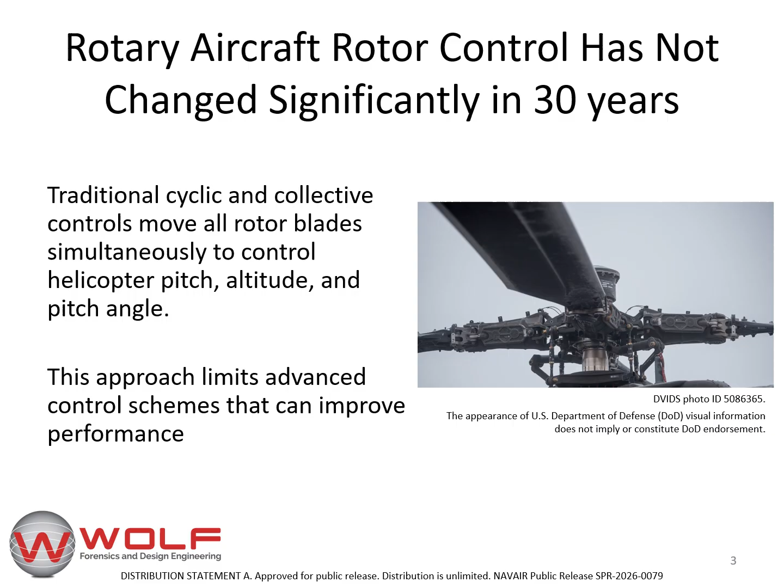Challenges of practical implementation of the existing technologies include reliability, lack of redundancy, failure modes, system performance, packaging, production, cost, and maintainability. NASA started experimenting with different control mechanisms in the early 1990s, including one promising approach, individual blade control, which we will refer to hereafter as IBC.

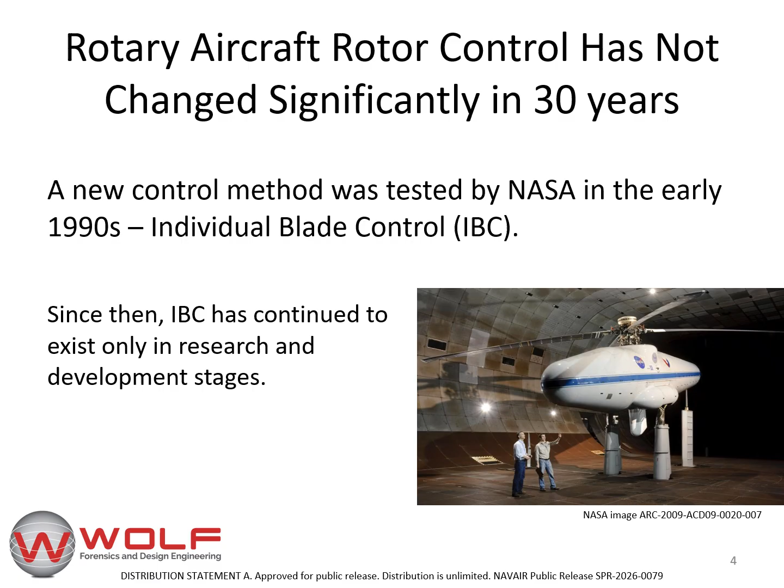As IBC technology has improved since then, Army and Navy technical leads have shown interest in further development for their rotary wing platforms. However, even with Armed Services investment, existing IBC technology has only been implemented in experimental settings, with actuators placed in the rotating system in series with a conventional swash plate mechanism. Utilizing these actuators in the rotating portion requires hydraulic and electric slip rings, which contributes to increased technical complexity and risk.

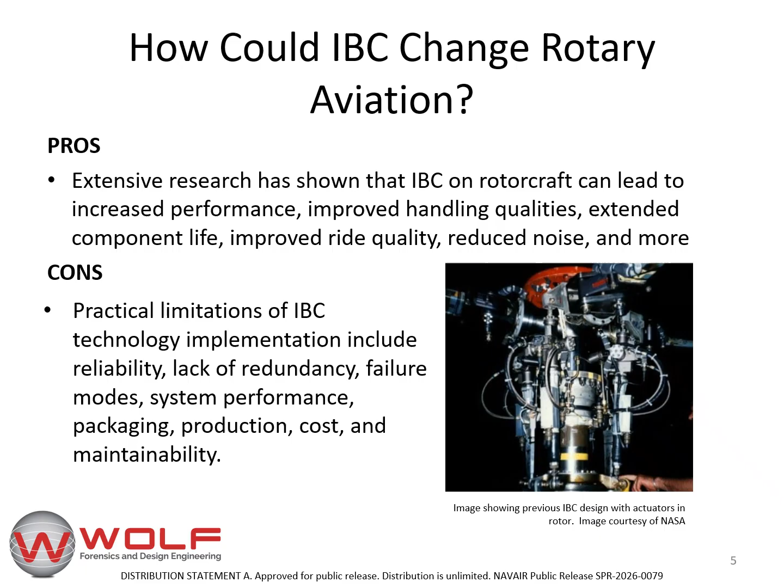The benefits of IBC are well established: better handling, reduced vibration, lower noise, and longer component life. But practical implementation has been limited by reliability, complexity, and integration challenges, especially with systems that require rotating actuators and slip rings to transfer power between the stationary and rotating portions of the rotor system.

The Navy's challenge is to enable fully independent control of each rotor blade, not just at the primary frequency, but up to 7 times that frequency, while maintaining extreme reliability with a probability of loss of control, P-loc, of less than 1 in 100 million flight hours. Maximum pitch authority also needs to remain comparable to existing platforms. This applies to both traditional helicopters and emerging eVTOL aircraft.

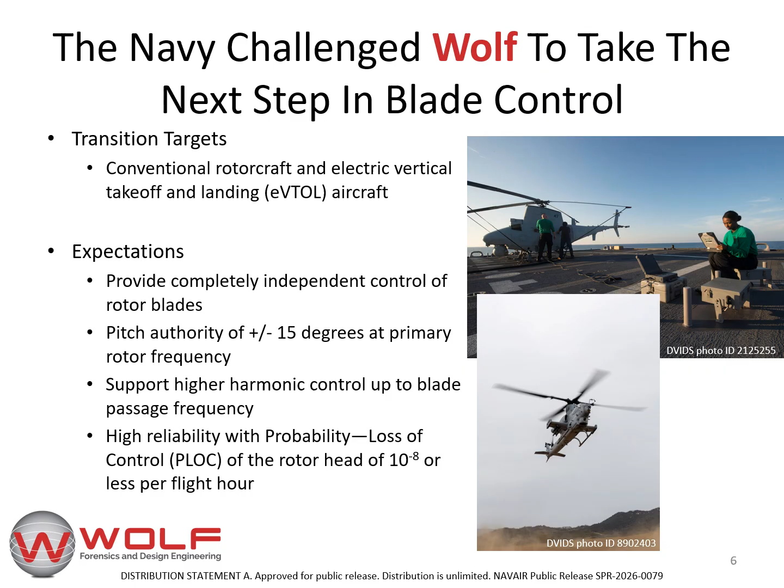Wolf Technical Services has developed a novel architecture that places actuators in the stationary frame, avoiding many of the failure points of past designs. Blade pitch is transmitted via a mechanical linkage. The primary performance requirements for the system are blade pitch authorities of plus or minus 15 degrees at the primary frequency, plus or minus 2 degrees at 2 times the primary rotor frequency, and plus or minus 1 degree at 7 times the primary rotor frequency.

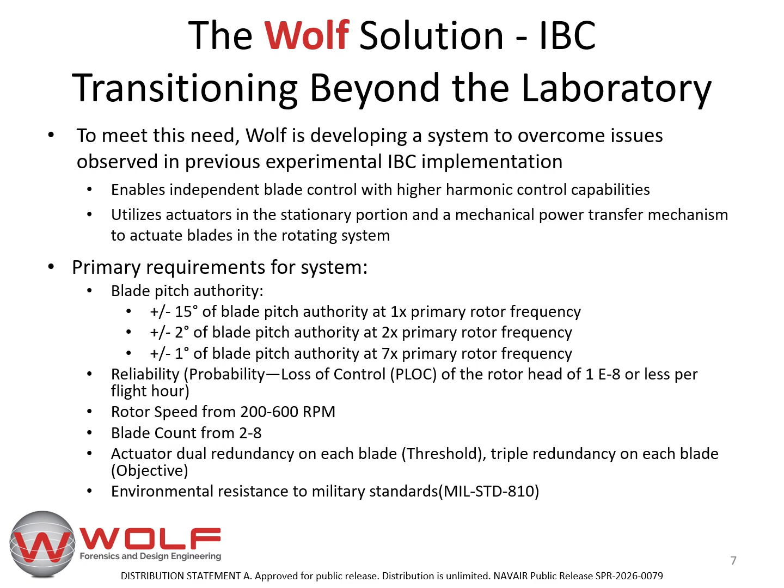The system must also work with rotor systems operating at 200 to 600 revolutions per minute and scalable up to 8-bladed systems. Recall the high standards set for us. Reliability targets are for a minimum of dual redundancy on actuators for each blade and P-loc of less than 1 in 100 million flight hours. The system must also be resistant to environmental conditions tested against MIL-STD-810 standards. Lab demonstrations and testing on a small-scale prototype system were completed during the Phase 1 and initial Phase 2 efforts.

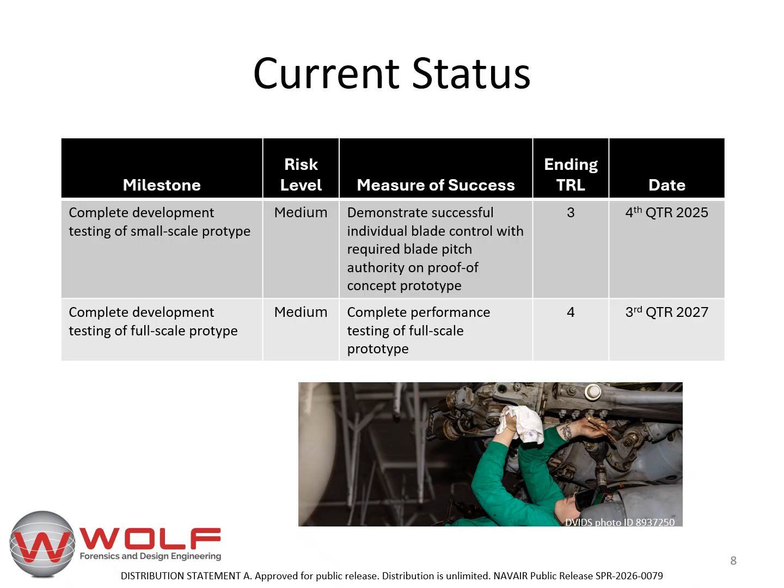Validating core actuation and mechanical power transmission concepts as well as performance. Ground testing on a higher fidelity full scale prototype is planned for completion by the end of the Phase 2 period in Q3 of 2027. This system will incorporate additional features addressing reliability and environmental resistance aspects of the system design.

One of the biggest differentiators is our use of actuators in the stationary frame. Unlike legacy IBC systems that place actuators in the rotor hub, where they're subject to high centrifugal loads and harsh environments, our design transmits control mechanically from the fixed frame to the rotating blades. This dramatically improves system reliability and maintainability, and eliminates the need for high-speed data or power transfer across a rotating interface.

The system supports higher harmonic pitch inputs, up to 7 times the primary rotor frequency. That enables fine control over aerodynamic loads, leading to significant reductions in vibration and acoustic signature. For military platforms, that translates to stealth and survivability. For commercial use, it's about noise abatement and ride comfort.

One of the key advantages of our design is that it supports multiple actuator types, including electric, hydraulic, and electro-hydraulic actuators. This makes the system highly adaptable for integration across different aircraft platforms, depending on available onboard power, environmental requirements, and mission needs. To control the rotating blades from a stationary actuator, we developed a mechanical power transfer mechanism. This approach preserves the benefits of a fixed frame actuator while drawing on proven concepts from legacy rotor system designs.

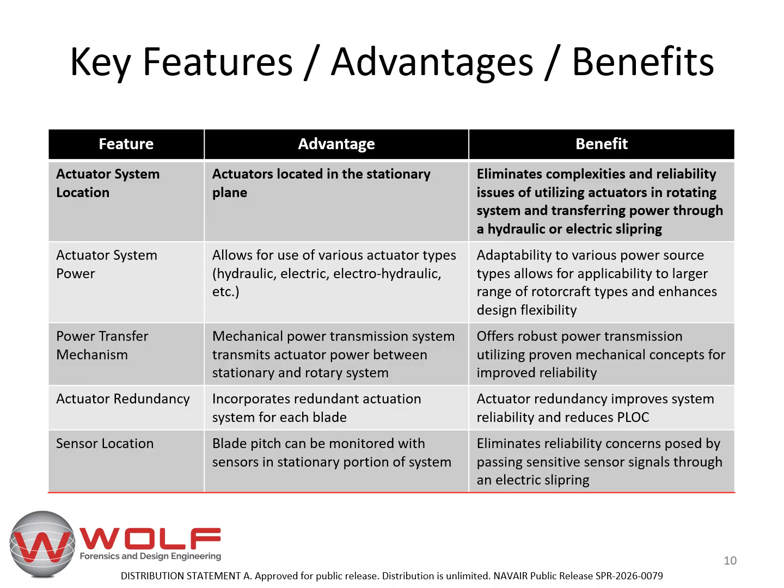The system design is also conducive to dual or triple actuator redundancy for each blade to improve reliability. Feedback sensors for control are also located in the stationary frame to eliminate the need for complex slip rings. Our current program is focused on demonstrating and validating the key performance capabilities of the IBC system in a grounded lab environment. That includes proving out the actuation system, control authority, and harmonic response under controlled conditions.

The next step will involve higher fidelity ground testing, such as whirl stand evaluations or testing on grounded rotorcraft platforms to simulate operational loading and dynamic behavior more realistically. These efforts are planned for post-Phase 2 activities. Ultimately, transitioning to flight test and fleet integration will depend on strong collaboration with rotorcraft OEMs and continued support from the Navy. Those partnerships will be essential to refine the design for airworthiness, integrate with specific rotorcraft architectures, and move toward production deployment.

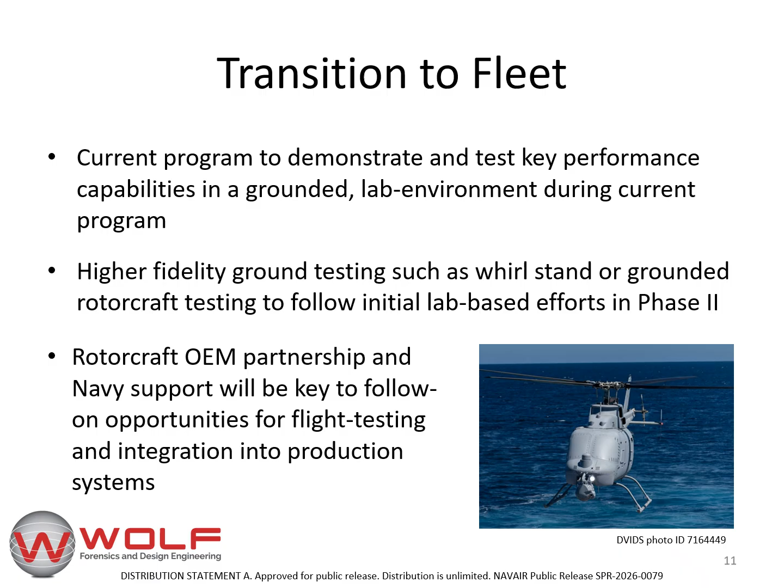The benefits of IBC include reduced vibration, improved performance, and lower acoustic signature, all of which are highly attractive across the rotorcraft industry. In the military sector, IBC can enhance mission effectiveness by improving handling, extending component life, and reducing noise signatures. On the commercial side, ride quality and noise reduction are key differentiators, especially in densely populated environments or for urban air mobility. IBC's ability to address those factors gives it strong potential in these sectors.

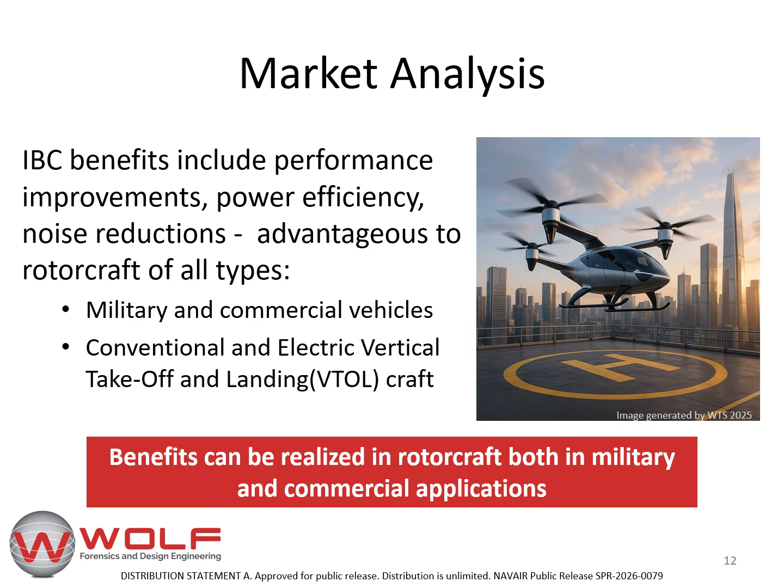Because the core system is platform agnostic and scalable across blade count, rotor speed, and actuator type, it can be adapted to a wide range of platforms including conventional helicopters and eVTOLs. IBC technology implementation has value for both legacy fleets and next-generation rotorcraft. Our commercialization strategy is to license a platform-agnostic version of this technology with strong IP protection. Lockheed Martin's Sikorsky subsidiary is our current transition partner, and we're open to additional OEM partnerships to expand integration pathways.

Importantly, to reduce risk for technology development, we have conducted extensive risk mitigation for partners, including system integration, size and weight, reliability, actuator power and speed, and sensor signal transmission across stationary and rotary frame surfaces. Give us a call to discuss how we can conduct the same assessment for your platform.